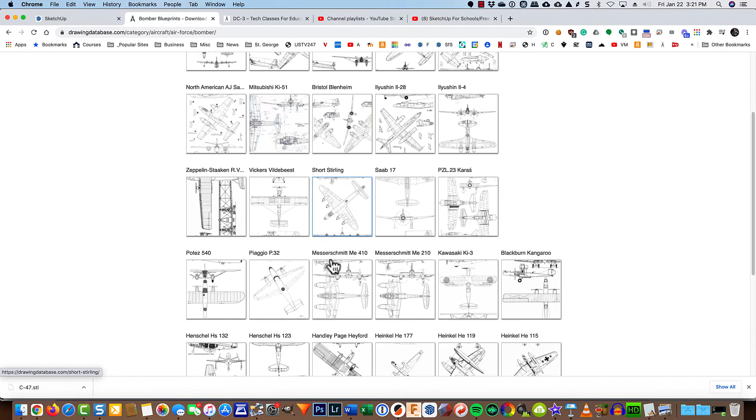I based my design on a blueprint that I found from drawingdatabase.com. So if I just type in C-47, there it is. Now there's all kinds of other aircraft. So if you wanted to make like a Lancaster bomber, I'm sure it's in here somewhere. Here's Heinkels, whatever you want to do.

It's basically going to be the same process. On my website, though, I have a link that you can click right here so that you can download the blueprint if you decide to stick with this one, or your teacher can give it to you.

Before we get started, a few tips. First of all, this video that I made right here is probably going to be indispensable. When you look at the table of contents, you'll see that there's all kinds of indexed videos. It's an hour and a half long. I don't recommend you watch the whole thing start to finish.

You're not going to learn much that way. However, as you're following along, one mouse click at a time building your own DC-3, say I do something with the Move tool and you want to know a little bit more about it—well, there it is right there. So you just click on that time mark.

And it'll open up at that specific spot and give you a one or two minute explanation of how you use the Move tool. You also have, within SketchUp, the instructor. Once I start a command, say R for rectangle, the instructor over here is going to give you a quick overview of how to use the rectangle tool, but much more important are the modifier keys.

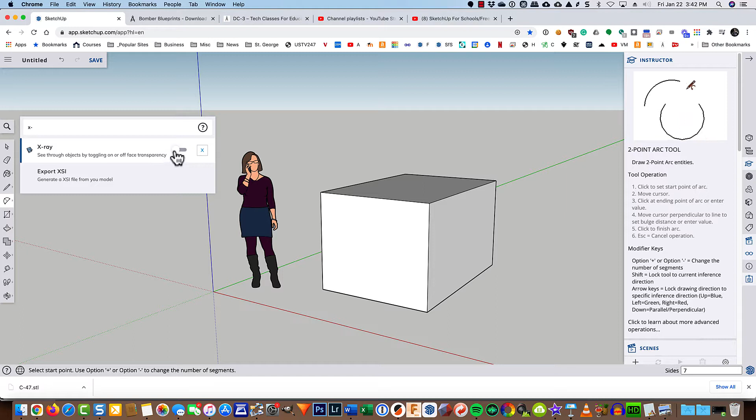The one that I'm going to use time and time again during these screencasts is X-ray. So I'll type in X dash, and there's X-ray, and you can see right here that I have already set my keyboard shortcut to the X key. So while you can turn it on or off like this, once you've set that keyboard shortcut, you can just type in the X key. That is probably the most useful keyboard shortcut that I can suggest for you.

So let's go ahead and get started. Okay, let's go ahead and get started. I am using the web-based version of SketchUp.

That's either SketchUp Free or SketchUp for Schools. Essentially the same thing, except that if you're using the free web version, your files are stored in the cloud on Trimble Connect. And if you're using SketchUp for Schools, they are stored on your Google Drive. So we're going to go ahead and create a new file using millimeters, because that's what we use when we're working with 3D printing slicing software.

So we'll select that, and then we're going to take and just get rid of the lady. We don't need her. And you might have a different figure—it just depends. Now you've got all your different tools over here that you can use.

I'm going to be using keyboard shortcuts. So when I want to make a line, I'll type the letter L, and you'll see it pop up on the top of the screen. I'll verbally tell you which keyboard shortcuts I'm using. I find them much easier than trying to find where they hid the line icon or the arc icon, or some of these nested ones that you don't use very often.

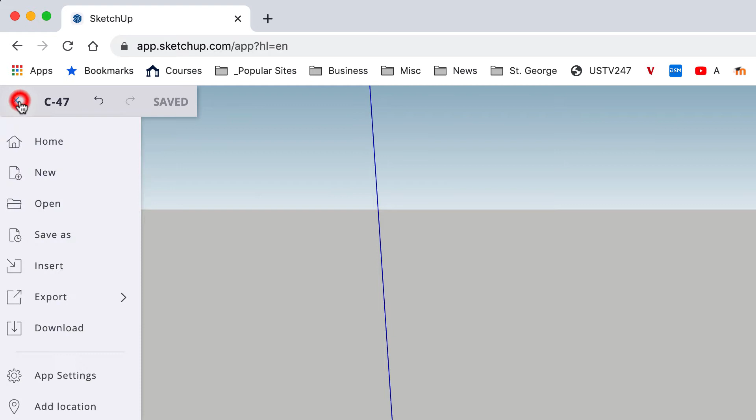Let's begin by inserting our blueprint. We'll go up to Insert, and I'm going to insert it from my computer. There's the file, so I'll double click on that, and I want to insert it as an image. There it is, stuck to my cursor.

It's good practice to place the corner of your image on the origin, where the blue, green, and red axes meet. So I'll click once, and as I move it I can resize it. It doesn't matter at this point how big or small you make it when you click the second time, because the next thing we're going to do is resize it properly.

So there it is. Now I'm going to come in here into my scenes and go to my top view. So there we have it—that is our image that we're going to go ahead and trace.

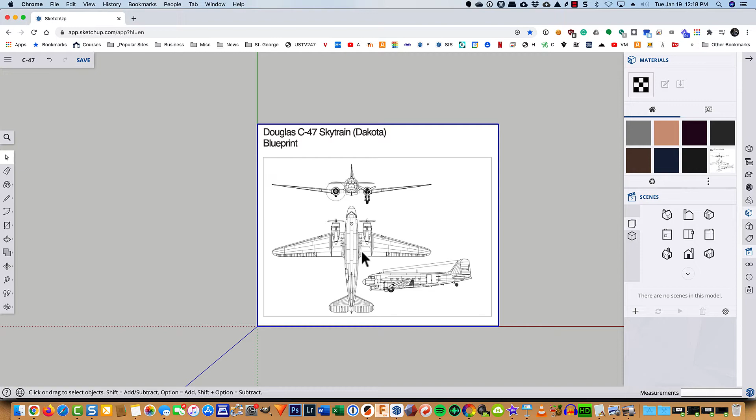Now, remember how I said it doesn't really matter initially how large you bring in the blueprint? That's true, but now we're going to size it properly. Your 3D printer is going to have a space limitation. Mine happens to be about 210 millimeters wide, so if I make my wing too big—say 300 millimeters wide—my printer won't be able to execute that. However, it's a good idea to know the size limitations of your printer.

However, if you're unsure at this point, just go ahead and make the wing 180 millimeters wide, because once you export this, you can scale it bigger or smaller and everything scales proportionally, so that'll work as well. So let's get back into SketchUp here.

We're going to zoom in on the wing, which is the widest or longest part. I'm going to type L for line, and just draw a line approximately from one wingtip to the other. Now if you look down in the measurement dialog box in the lower corner, it told me that line is about almost 1800 millimeters long, and that's obviously too long, isn't it?

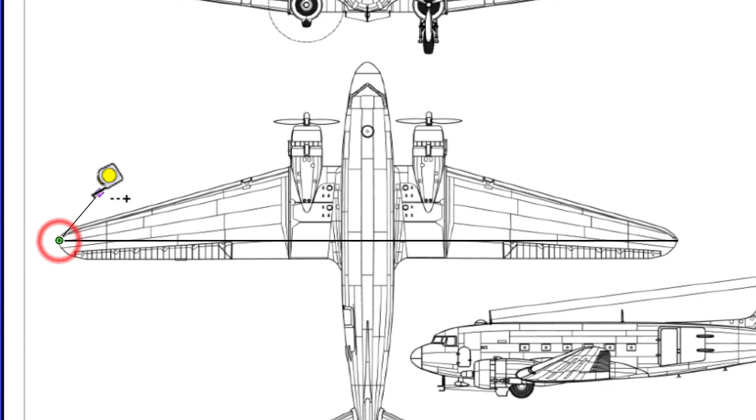So let's find out how long it is exactly by typing T for the tape measure tool, and let's measure from this endpoint to this endpoint of the line—the pop-up tells me it's 1756 millimeters long. I'll click on the other endpoint, and then without doing anything else—don't click the measurement dialog box, don't click OK, don't hit enter—just type in 180 using your keyboard. When you hit enter, you get a pop-up asking if you want to resize the model, in other words resize everything. We'll say yes, click OK, and it looks like it shrunk, and in real life it did.

So I'm going to type Shift Z to do a zoom extents to bring everything into view, and now when I measure this, it's 180 millimeters long. So anything we draw from here on out, we can be pretty sure it's going to fit on the bed of our 3D printer.

Now I'm going to type the space bar, which brings up the arrow or select tool—it's this one right up here, and that's a very handy shortcut. You can get out of any command by typing the space bar, and it brings you back to the select tool. I'll click on that line because I don't need it anymore—I only used it to scale the drawing. And hit delete, then use the wheel on my mouse to come in here.

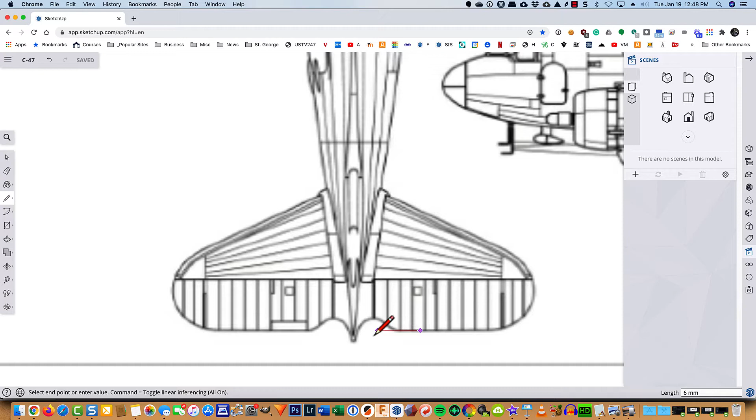I'll use the icon this time. Actually, technically it's the line tool. Let's just go ahead and click on this line right here for now, and let's go over along the red axis. Let's zoom in here so you can see what's going on a little bit better. See how it's kind of jumping around and snapping?

Okay, so we need to go back and adjust something. I'm going to hit escape right now, and I'm going to come into my model information. So with my model information opened up here, you can see that we are drawing in millimeters.

We want to change the precision, because right now it's snapping to every 1 millimeter. So let's change the precision to 3 decimal places, and let's change this number here, instead of 1 millimeter, let's make it 0.001 millimeters, which is really very small, but that's okay.

So we'll hit enter, and then we'll come back and restart our line tool, and come from here over to about there. I'll go ahead and pause right there, and then I want to come up a whole number. Right now I'm looking down in the measurement dialog box, and it says about this point it is about 19-20 millimeters.

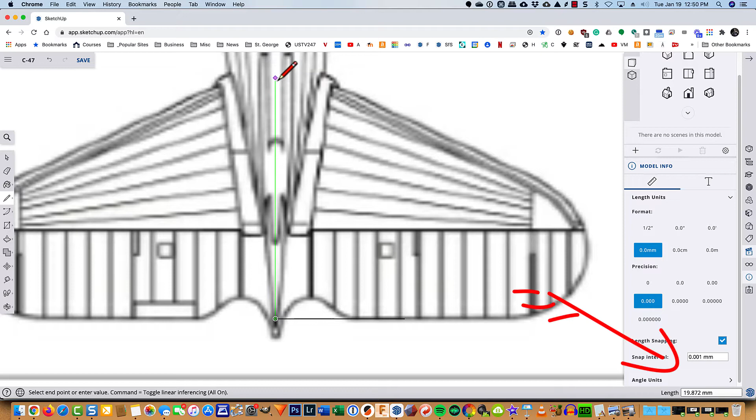So what I'm going to do is just click well short of it, and then I can change the length of the line by just typing in 20. So I type in 20, and I did not click down in that box—if you do that, it's not going to work. You just go ahead; SketchUp is waiting for you to tell it what to do. So we'll type in 20, hit enter, and we've now got a line that is 20 millimeters long.

And I'm going to come over to about here on my fuselage, and then I'll come down to about right there. Now you don't have to trace it exactly—what I'm doing is good enough. And then I'm going to come down to here, click, and then along the red axis, click there, and you should get a face.

SketchUp draws everything based on a series of edges, and when you enclose or connect those edges so that it's what's called watertight, then it makes a face for you. Of course, all the edges have to be in the same plane.

Now you can zoom in here and try to make a semi-decent arc, but instead what I'm going to do is just type in A for arc. I'm going to click once here—that's where my arc starts. Down in the lower left part of my screen, it asks me where do I want the end point of the arc to be.

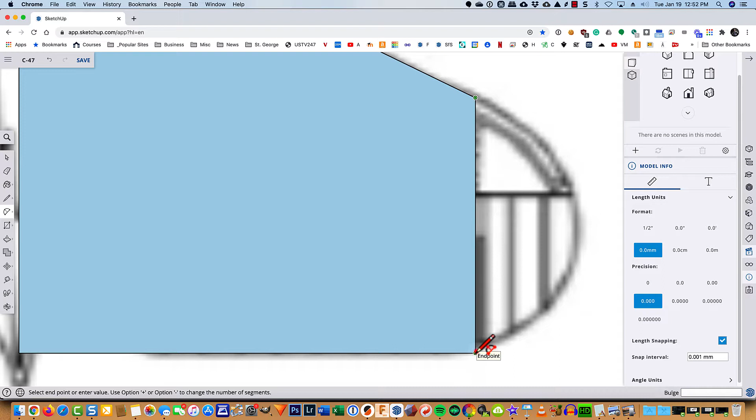So I want it to be right there, so I'll click one more time, and then we give it what is called the bulge. Now see that red line across the middle? That means we're drawing in the same plane, along the red axis. And we'll come out to about here.

E for erase, and I can erase this line segment here. So I've now got half of my horizontal stabilizer.

I'm going to go ahead and choose a view like this. You can also hold down the wheel on your mouse to orbit around. And I'll zoom in here, and now I'm going to use the push-pull tool to give this thickness. So I'll come to this face, click on it, pull it up, and type in 2.5 millimeters.

So now you've got two numbers that are important to remember: the length of this right here, in other words we're looking at this rectangle right here—the height of the rectangle is 2.5 millimeters and the length is 20 millimeters. And we're going to need that for making that rectangular hole in the fuselage.

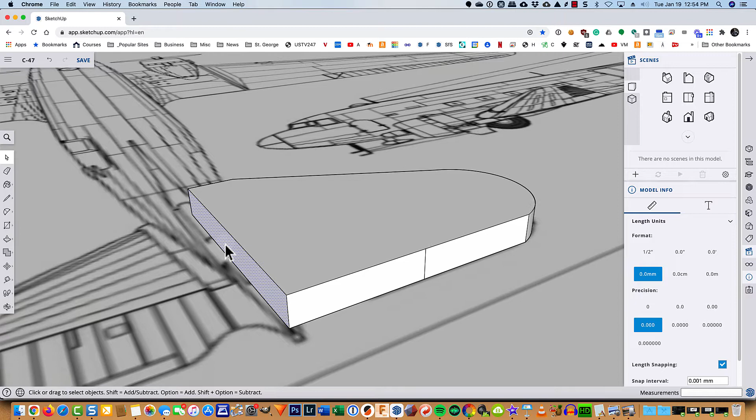So with this much done, I'm going to select this geometry. To do that, I'll draw a box around it, holding down my left mouse button to select everything completely enclosed within that selection box. And when I let go, there it is.

Now I'm going to copy it, Command or Control C, and paste it. And now I've got another one. It doesn't matter where we put it, so let's just stick it over there for now.

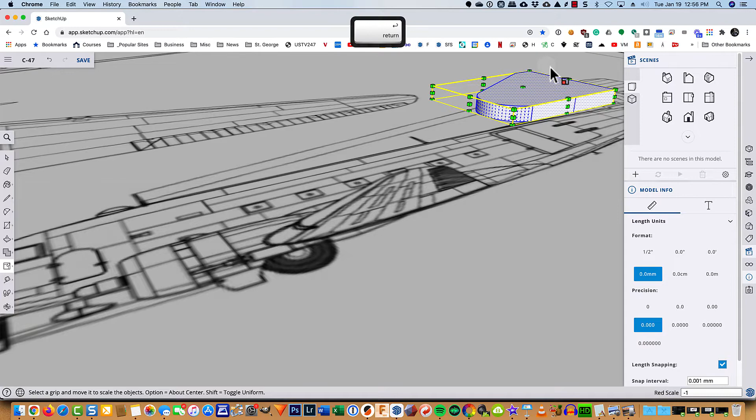Then I'm going to type in S for scale. If you've used other CAD programs and you're used to mirroring things, SketchUp doesn't have a mirror button or command. What you do instead is scale it. So I type S for scale, grab this point right here, and start to drag it and turn it inside out. Where you stop is always -1. I stopped at -0.8, so I'll type in -1 — it's always -1 if you want to mirror something. I'll hit return. So there we have that.

Hold down my shift key, press on my mouse button, and now I'm going to move this into position. With it selected — and if you accidentally deselect it, draw a box from upper left down to lower right around it like that. Or another way to select all of that geometry is to triple click on it quickly.

Then I'm going to type M for move, and down in the lower left corner it tells me to pick my base point. So I'll pick that little part right there, and then it's moving, and I'll zoom in and connect it right there.

Now I've got some extra lines, and normally they're not going to make a big difference. However, in 3D printing, extra lines can goof stuff up. So let's take our eraser — let's click outside here to deselect everything. Now let's choose E for eraser, because I don't need that line segment, or that one. I'm going to run it over, upside down here, and I can't see it because the drawing is in the way.

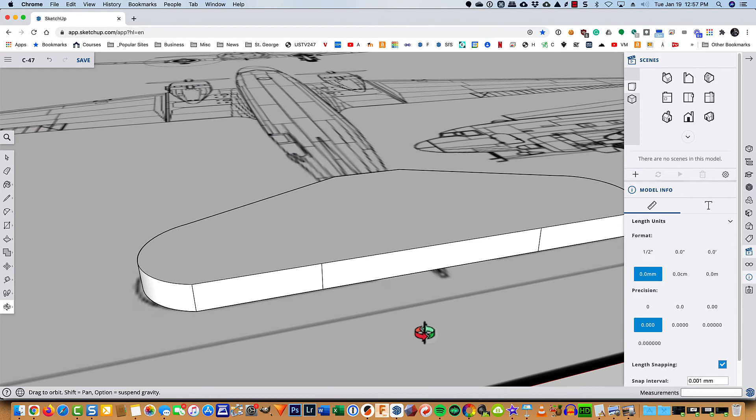So I've got one here, and remember I told you to make a keyboard shortcut for X-ray? If you did that, type in your X key, and now I can see that line segment right there, and I can erase it. Type the X key again to turn X-ray off, and we've now got our part.

Our horizontal stabilizer is nearing completion. Now at this point, it's very important that you connect all this geometry together to protect it. All these line segments and faces need to be grouped together. Fortunately, that's very easy to do. I'll go ahead and tap my space bar, then triple click on all of that geometry, right click, and make it a group.

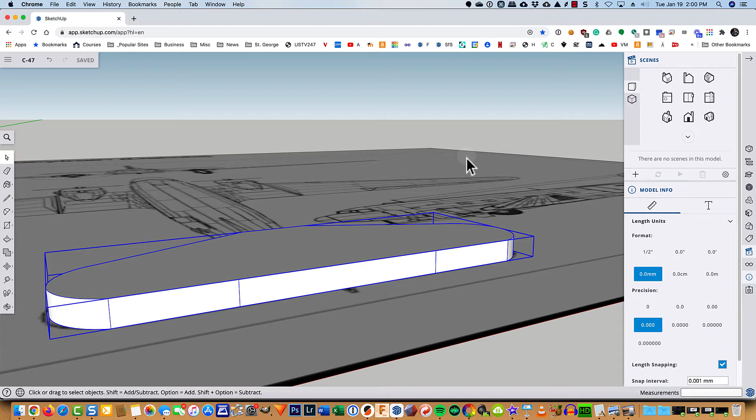And then I'm going to come up here and choose Save, and we'll add the elevators as soon as that's done. We're going to use the push-pull tool to add our elevators, and we'll be using it for adding other little details, because right now this horizontal stabilizer is kind of plain looking. Let's go ahead and talk about how we're going to do that.

I'll just go ahead and make kind of a box here quickly. Now if I want to change the geometry of this — say, for example, put a hole in this box — I type C for circle, draw my circle on the face, and then use the push-pull tool to pull in. If I want the hole to go all the way through, I need to orbit around so I can see the back side of the box. And when I go back, see that dual shading? That's called inference — it means I've reached that back face. So when I let go of the mouse now, I've got a hole.

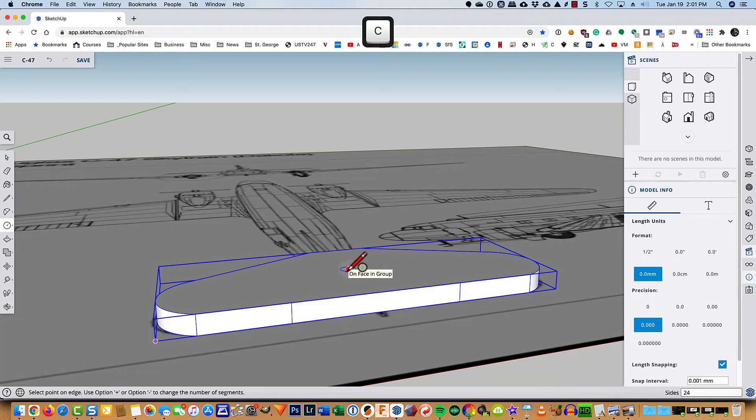And so we're going to basically use that skill to add some detail. I want to draw this way so I can just delete that. Okay, remember this is a group. So if I draw a circle on my group and try to make a hole through it with the push-pull tool, I can't go down. I can go up, I can make a cylinder, but I can't cut inside the group.

And that's because the group is essentially locked. Remember, we made it a group by triple clicking on it, right clicking, and choosing to make a group. Now, if we want to make changes to it, we can right click and choose Edit Group, or a quicker way is to select it and then quickly double click on it. You get this dashed line around it, and now we have our individual faces that we can edit. By the way, we don't need this line segment here, and we don't need this line segment here.

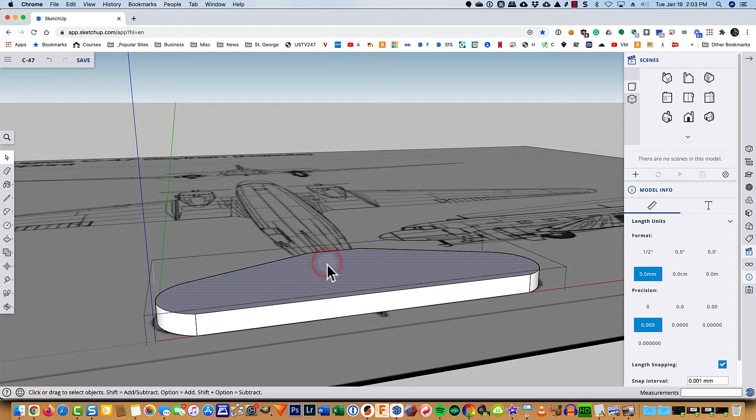That was created because I started drawing the profile of the horizontal stabilizer at a point about here on the drawing. Now, I can go to my top view here if I want to look directly down at it, but here's another trick for you.

Go ahead and select a face, not the group, but just a face, then right click and align the view. And now we're looking directly at it. So I'm going to turn on X-ray mode so I can see the drawing underneath. The first thing I notice is that I have two sort of concentric lines - not quite the right word since that refers to circles or arcs. However, I've got an edge here which represents the bottom of the horizontal stabilizer, and this edge here which represents the top of the same.

That is because this is in perspective mode. Let's go ahead and turn it to parallel projection here up in the scenes window. See, now the lines are on top of each other because we're looking directly at it.

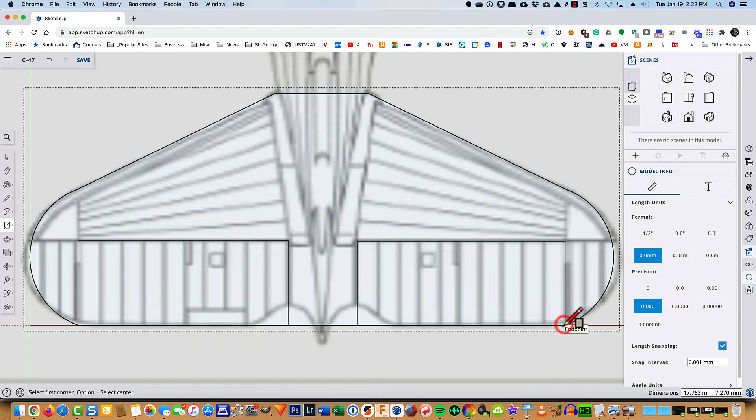So now what I want to do is draw my elevators, but what's important is that again I double click on this, or this time I will choose to edit the group. Then I'm going to type R for rectangle and pick that point right there and draw up to here along the face. Make sure you're on the face, and then I'll do the same thing about here and come down to this endpoint or vertex. So I'll turn X-ray mode off now and check my work.

So this is a surface or a face, this is a face, and this is a face. I have now split what was the top face of the entire horizontal stabilizer and created a couple of elevators for myself. So the next thing I'm going to do is just kind of draw some lines.

So I'm going to click on this face right here, and type in F for the offset tool. When I click inside, I can now draw a similar rectangle - we'll say that much right there. And I'm looking at my measurement dialog box, and we'll just type in 0.6 millimeters.

And we'll come over to this face right here, select it, type in F for offset, click, there we go. And again, I'll just type in 0.6 and hit enter. Then I'll check my work. So that's a face, that's a face, that's a face, that's a face, and that's a face.

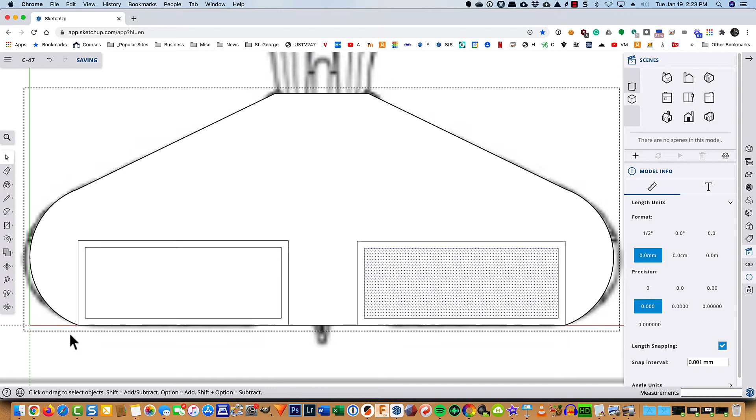And I can work with each of those with the push-pull tool. But what I want to do is split this. So I'm going to come up here, type in L for line, and just draw a line segment like this. Come over here, draw another one like this.

And now I'm checking my work. That's a face, that's a face, and that's a face. So I'm going to go E for erase, and erase that line segment right there. So I've now just got this and this, and this is what I am going to push-pull.

Come over here and do the same for this. L for line, draw along the green axis like so, pan over, draw another line like this, E for erase, check my work, and I've split those faces correctly.

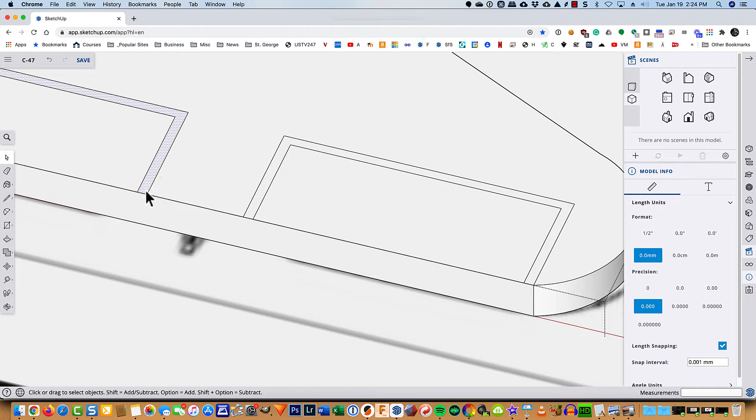So let's go orbit down around this for now, and I'm going to use P for push pull - got to select this first. P for push pull, and I'm going to pull down, looking at my measurement dialog box. I think about 0.3 will work, and then I can come over here, and if I just double click on this face, SketchUp remembers that I want to go down 0.3 millimeters. Whatever you used last, it will remember that.

So I'll click outside to close my group, and my horizontal stabilizer with elevators is now complete. Next, we're going to make the main wing, and it really isn't very much different than the horizontal stabilizer. I mean, they're both wings. We just need to make some modifications for our engines and landing gear.

So again, I'm going to just start with the line tool, kind of mousing along here. And again, I want this value to be a whole number so it's easy to remember. So I'm on my face and looking at my measurement dialog box, and it looks like about 28 will work. So without clicking, I'm just going to type in 28 and hit enter. And I've now got a line that is 28 millimeters long. Then I'll come across here, maybe about that point right there.

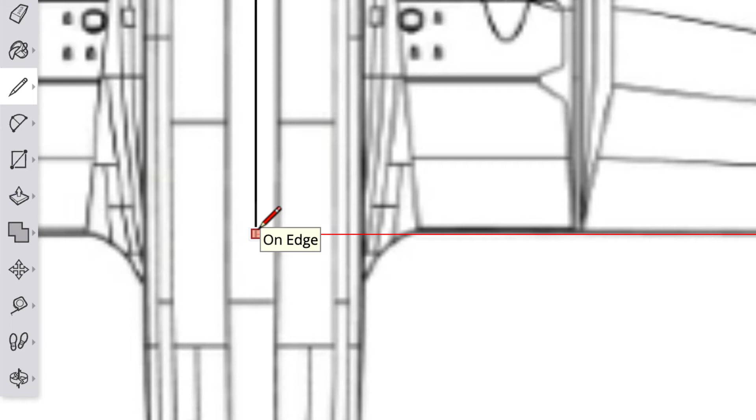And then I'll come down to about here, come down like so, and let's add a little bit extra detail. We'll make that like so, and then come directly across. And what we want to make sure is that the preview is showing that we're going along the red axis. So I'll go ahead and click, and that makes my face.

Now notice we've got a little bit of an extra line segment there, so I'm going to type in E for eraser, hold down my left mouse button, and drag through that. Sometimes you have to drag slow, because with the web-based version of SketchUp, all the heavy lifting is being done by computers in the cloud.

So this time when we make the wingtip, since this is more of an elliptical shape, we're just going to use the line tool to trace it. We're going to zoom in, and we'll click right here, and I'm just kind of coming around. Those magenta lines are telling me that's a continuation of the line, and I want it to bend. So there we go.

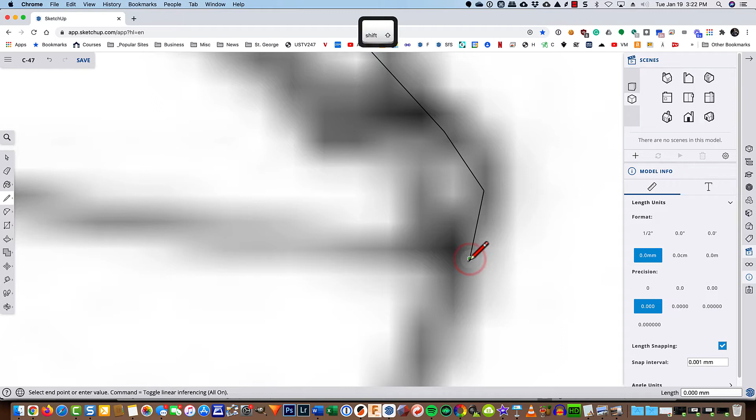Again, it doesn't have to be traced perfectly, but the closer you get it, the more time you spend zooming in and clicking, the smoother your wingtip will be.

I'm just holding down my shift key and pressing my mouse button so that I can pan around quickly. And then we'll connect that endpoint right there, and we should get a face. And we do.

So that's kind of sharp, isn't it? Let's go ahead and use our line tool to go from this midpoint down to about that midpoint, and then E for erase, and I'll slowly drag through those right there, and that smooths it out. That looks pretty good, and I'll get rid of that line segment right there.

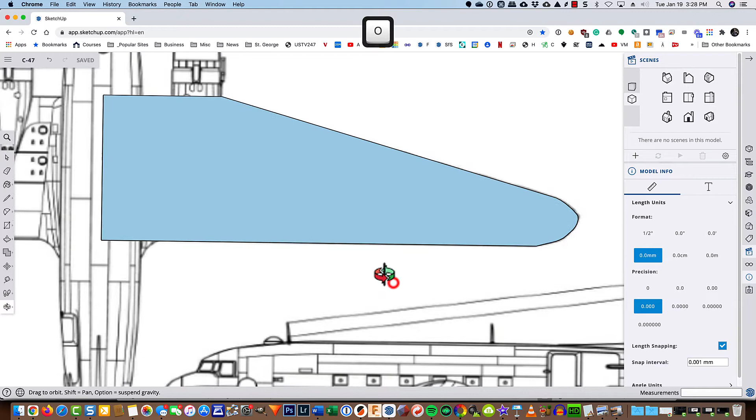So now let's go ahead and orbit this around. This time, to execute the orbit command, I'm going to just press the O key, and just kind of move up like so, and then go back to my select by pressing my space bar. Select this face, P for push pull, and pull this up the same as the horizontal stabilizer, 2.5 millimeters.

Then I'm going to go ahead and triple click on this half of the wing, and then choose to make it a group. Now to add my ailerons, I'm going to go ahead and edit the group. So I will right click and choose to edit the group. I'll select this top face, right click, and align the view so I'm looking directly at it.

Press my X key so that I'm in X-ray mode, and you can see right here the general outline of the ailerons. So let's go ahead and trace that. Again, you have to be inside the group, working and editing the inside of the group for this to work. So there is the outline of the aileron, but it's not going to show up in the 3D print unless we offset that line.

So I'll type in F for offset, click on this face. Whoop, I had more than the one selected, so there we go. Oh, you see what I did there? I missed that point right there, didn't I?

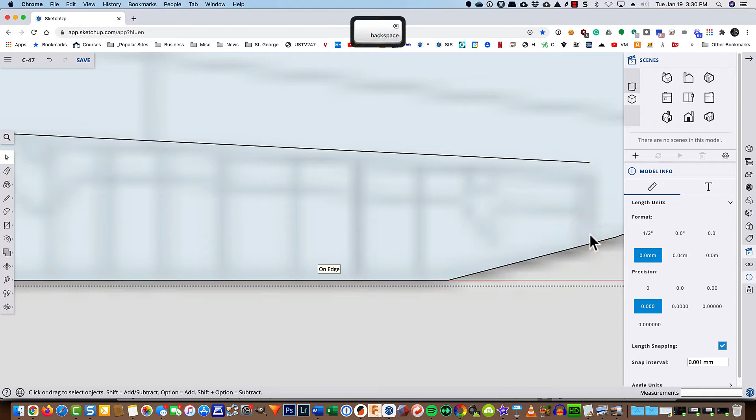So I'm going to take that line segment right there and delete it, and then go back to my line command and come down along the green axis and select that. So now checking my work, I'll go to the select tool, and that is a face, and this is a face. So I'll type in F for offset, click, and maybe, what did we do before? 0.3? Doesn't have to be exactly that, but that's good.

So L for line, and we'll split that face. Then we'll come across over here and split the other part right up here like this. And then E for erase, and erase that line segment.

And we'll check our work here. Let's turn off X-ray, and with my select tool, that is a face, and that, missed. Got to zoom in. There we go. That's a face, and that's a face up there.

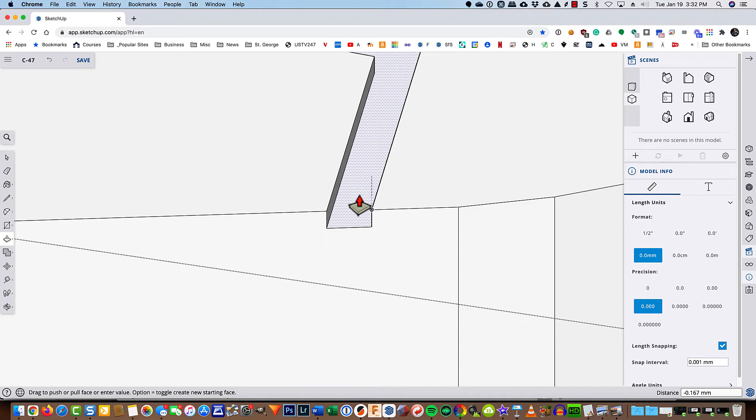So we'll now take and kind of orbit around like this. We will zoom in, select that face, type in P for push pull, and pull down. I don't remember how much we pulled down before. I should probably be taking notes, but just eyeballing it, that looks like a good amount. So we'll just type in 0.2, and that part of the wing is coming along nicely.

Now you can embellish the top of your wings any way you want. I am going to embellish mine with invasion stripes, because each C-47 during the landings at Normandy on June 6, 1944 were painted with black and white stripes on the wings and on the tail of the fuselage.

It didn't matter if it was a C-47, a fighter, a reconnaissance airplane, or bomber, whatever. They all had these stripes, so they were easily identifiable.

So to do that, if your group is not already edited, just double click on it to open it up for editing. You'll be able to identify that it's now ready for editing by the dash box that goes around it. I'm going to type in L for line, and go from this vertex along the green axis down to here.

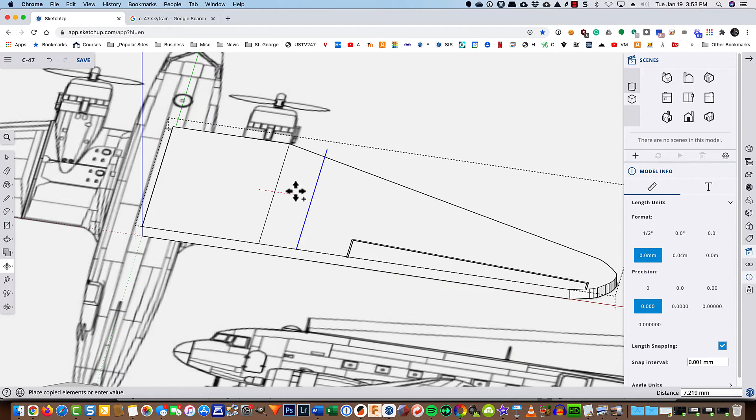Then I'll tap my space bar, select this line, and type in M for move. It doesn't really matter where I click for a base point, but as I start to move it, it starts to do some goofy stuff. But what I want to do is not just move it, but copy it. So I'll tap my Option or Alt key once, and come in here and eyeball what looks like a reasonable distance.

Let's see, that's about 3 millimeters. I'll just type in 2, hit enter. If I don't like it, without clicking anywhere, I can type in 3 and hit enter, or type in 1 and hit enter, and do that over and over until I get what I want. But I kind of like 2, so I'll type in 2 and hit enter.

Now I can do that again and again, and that works, but SketchUp has this neat tool built in. Notice I have not clicked my mouse, I have not touched my keyboard. But what I'm going to do now is type in 5x to make 5 more copies. And now I'll hit enter. So now I have 1, 2, 3 invasion stripes.

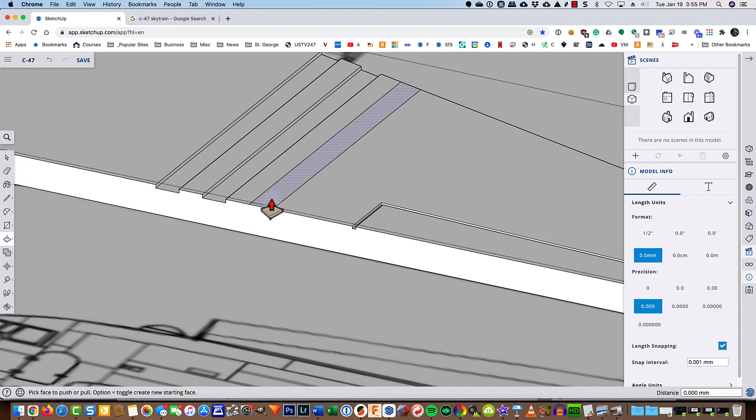So I'll go ahead and hit enter, grab my select tool, E for eraser, and slowly drag across this extra geometry up here that I don't need. Then I'll orbit around, click on this face, type P for push pull, pull down a little bit, so we'll say 0.3, and then double click here and double click there, and I've now got my invasion stripes.

So there's just one more thing we need to do. Let's click on this group and double click to open it up for editing. Right click and align the view so we're looking directly at it, and type X for X-ray. What I need to do is make a notch, and you'll see why later on, for the engine and landing gear assembly that we're going to use for assembling our model.

So I'm going to again execute the line tool, pick a point about here, come down, in this case maybe about 6 millimeters. I'll come across 2.5 millimeters because that's the thickness of our 3D printed parts. Hit enter and come up to here. So now checking my work, that's a face and this is a face.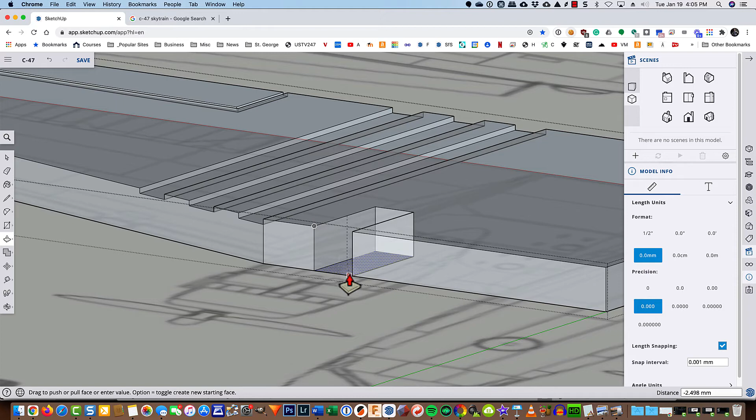So I'll orbit around like so. There we go. My mouse doesn't always work with the web-based version of SketchUp like I want it to. In any event, P for push pull. I'll click on this face and pull down until I get to this bottom edge, and that makes a notch for me. So we'll turn X-ray off, and you can see we have that notch.

So I'll hit my space bar for select, click out here, and you probably know what's coming next. I'm going to take this, copy it, then paste it, click up here, type in S for scale, grab a grip and start to drag. And what number do I put in if I want to mirror part? Excellent answer there, Andy. So we'll type in -1 and hit enter, and we now have a mirror image of that group.

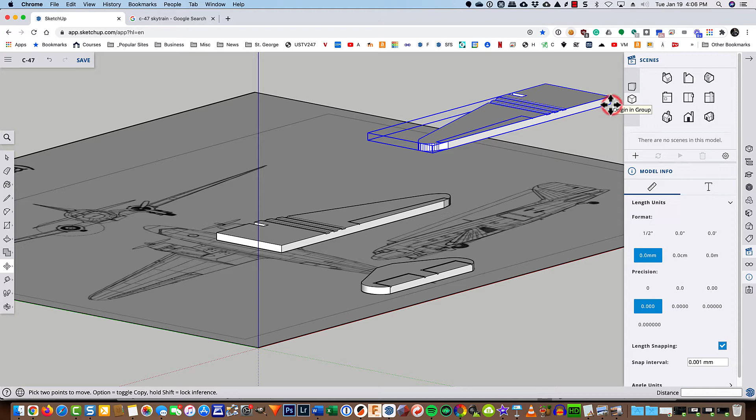So I'll hit my space bar to get back to my select tool. It's still selected. Type in M for move, grab that vertex right there and come down and attach it right there. And that's looking pretty good.

All we need to do now is just go ahead and edit this geometry so that it's going to be happier when it comes time for 3D printing. To do that, since I can't edit two groups at the same time, I'm going to click on this group right here, and I am going to explode it, which basically ungroups everything.

So now that that's done, this is a face, this is a face, this is an edge. I'm going to select this one right here, right click, and explode it. So now it is no longer grouped together. Then I'm going to come up here and grab my erase tool and erase that line segment and erase this line segment. I'll orbit around.

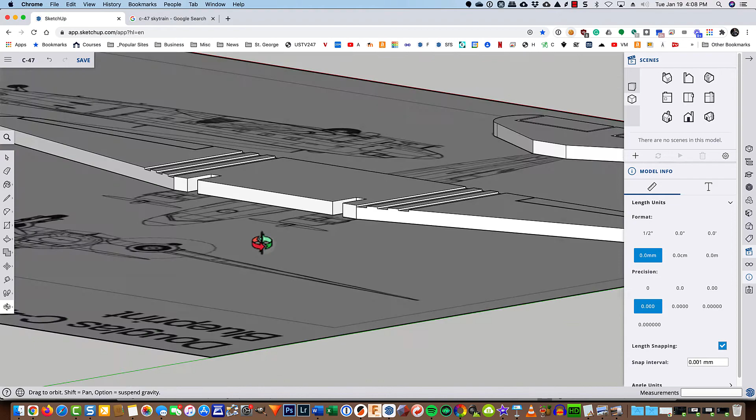Erase that line segment. And remember, because of our blueprint, I can't see the bottom. So I'll just zoom in here, go to X-ray mode, and there's the line segment I want to erase. Then I'll go to my top view and turn X-ray mode off.

And then I'm going to draw a selection rectangle from top left to lower right. Notice the selection box is a solid line. What that's telling me is that only the line segments and faces that are inside of it are going to be selected. It's not going to select the drawing below. When I let go of the mouse, it selects everything that's associated with my wing. I'm going to right click, make it a group, and now the wing of our DC-3 is done.

Next we're going to move on to making the fuselage, and just a couple things I want to point out before we begin that are important. There's a lot of detail in this blueprint: the windows, these little frames right here. It's just a lot of different details, and this is why we need to be a little bit careful when we do our drawing. We need to keep in mind that even though you can draw almost infinitely thin line segments with SketchUp, you can't print infinitely thin lines on a 3D printer.

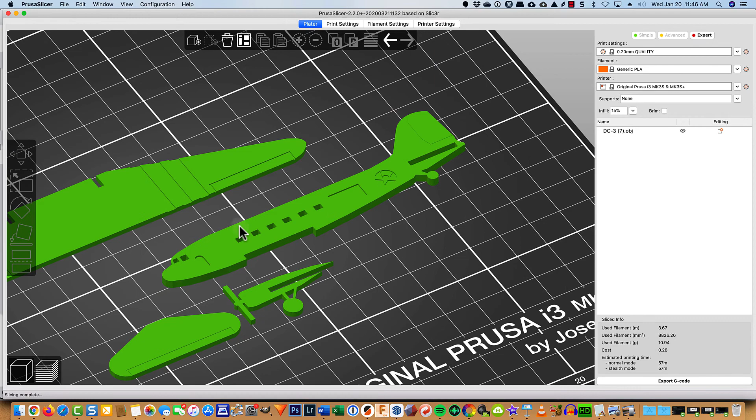Let me explain. Here is, for example, the fuselage right here. I'm going to go ahead and just move it a touch here, and now I'm going to slice it. And that's going to give us this blueprint here. Kind of a color code, but each of these lines here is filament that gets extruded out to form our shape.

You'll notice if we come up here to the window, or the cockpit windows, that when I modeled this the first time, I was really careful in this area not to get too close, because if you look right in here, you can see that that's only 2 layers thick for the perimeter going around the windows. Same with the doors, same around here. So we can't get too detailed.

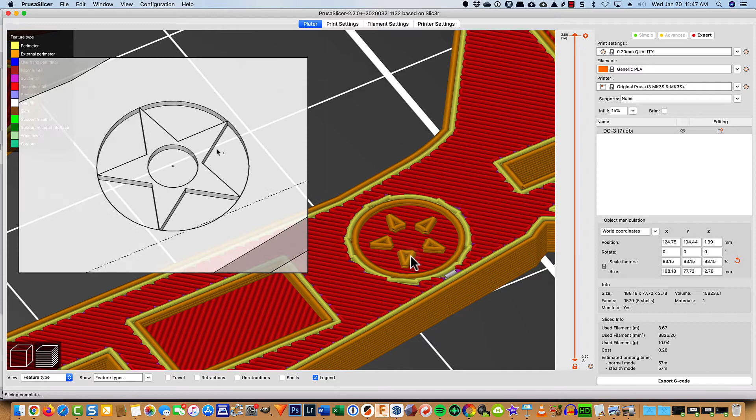The star in the back here, see it, there's a lot more detail in the SketchUp model when I made it, but the 3D printer just couldn't slice it that precisely. So let's keep that in mind as we go ahead and get started on the fuselage.

Let's go to our top view, and then we're going to zoom in on the nose, and I'm going to go ahead and do the nose, which is the most complicated part first, and then just kind of quickly click around, because if you can do the nose, you can do the rest of it. So we're going to start with the line tool just as before. Maybe I'll start about right here, and we want to make sure that we stay on the face of the image with each click.

It's a straight line there for the front of the windshield. And the more you zoom in and the more little edges that you create here, the smoother your model's going to be. That is, the edges of it when you 3D print it. So I'm going to come straight down like that, and just kind of come along here.

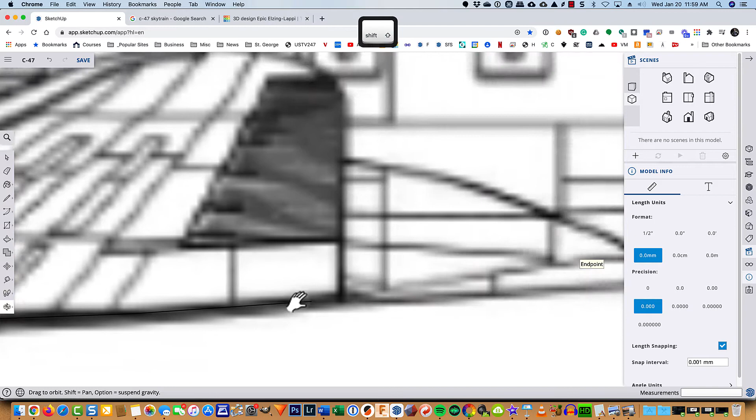And then we can't see behind the engine and the wing, but we'll just kind of guess here. Again, zoom in and out. And let's see, maybe I'll connect that endpoint along that edge there, and then erase this and this. Okay, and then let's see here.

I want to go ahead and just close that so that we have a face. So there's an endpoint, and I think I started up here. There we go. So there's our face.

And so let's go ahead and put the nose on this, and I'm going to try an arc. Let's see how that works. So there's my start point, there's my end point. I'll just pull it out like that. You know what? I'm going to redo that, and this is why.

I want it to be really smooth, so when I click on arc, it doesn't ask me the number of sides, but I can bump it up and down, remember, by holding down the Option key and pressing the plus and minus sign. So 10's probably going to be pretty good. Again, it just depends upon what level of detail you want. If it's too many sides, you're going to have to shorten it.

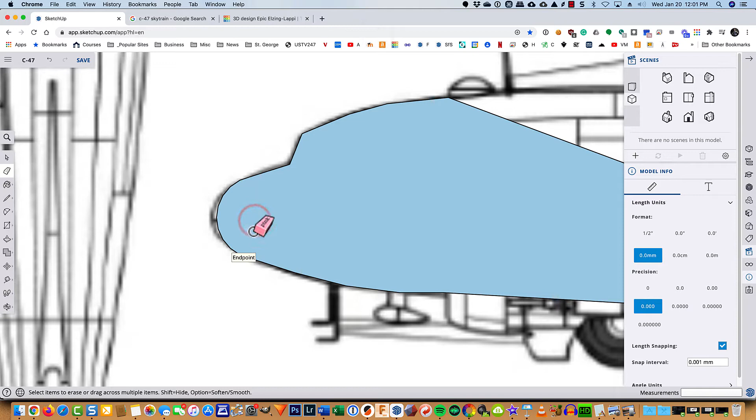We'll take our eraser tool and we'll erase that line segment right there. And now we're going to turn on X-ray so that we can trace.

And there isn't really any way I can put this window framing in, you just have to be careful. Remember, your 3D printer extrudes liquid filament at typically 0.4 millimeters. So if I put a guideline off of this edge and pull out, then type in 0.4 and hit enter, that is the width of one bead of filament. So that would be—I kind of like to have two beads.

So what I'm going to do now, when I make this line, I'll erase that guideline or undo it. I'm just going to come to here, across to here, down to here, not on the line but on the face, like so. The reason it didn't make a face is because we have X-ray turned on.

See, that's its own face now. So let's turn X-ray back on, and let's put in one divider anyway. I'm going to take this line, grab my tape measure tool, and don't grab it by the midpoint, just grab it along the edge here. Let's pull back parallel to that, maybe right about there. I'm going to erase this guideline because I don't need it anymore.

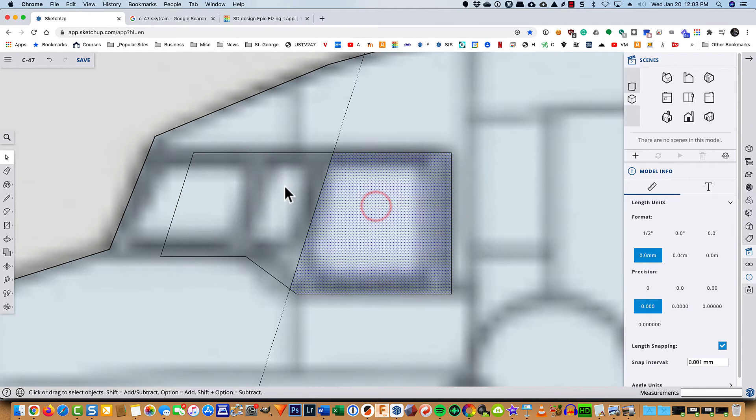There we go. And then I'm going to draw a line here. Whoops, I missed—let's zoom in here. From this intersection up to this intersection, which splits that into two faces. And then I'm going to take my tape measure tool and pull back this way. Okay, excuse me, phone rang.

So I'm going to just copy this line over. A lot of ways I could do it, but I'll just pull out another guideline, maybe to about there. That's 0.7—let's make it 0.8. I'll type in 0.8 and hit enter. Now I'm just going to draw another line from this intersection down to there, then erase that line segment and that line segment, and I can erase the guidelines, and there are my windows.

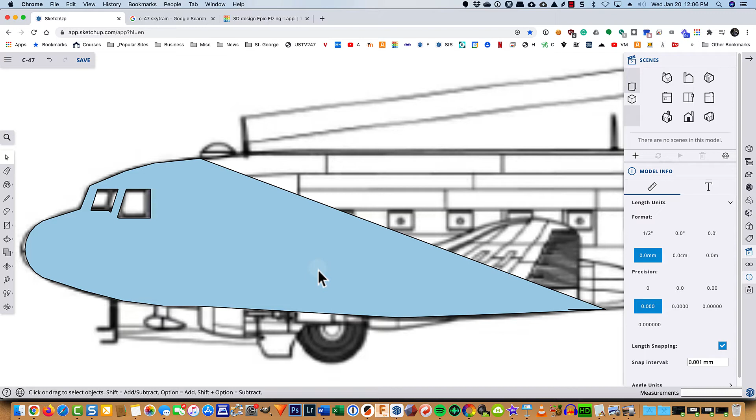So I'll turn X-ray mode off, select this face and delete it, and select that face and delete it, and that looks pretty good. We'll see how it slices—we can come back in and fix that. So I'm just going to stop talking here and start filling in some of this geometry, and as I need to, I can come back and explain things for you.

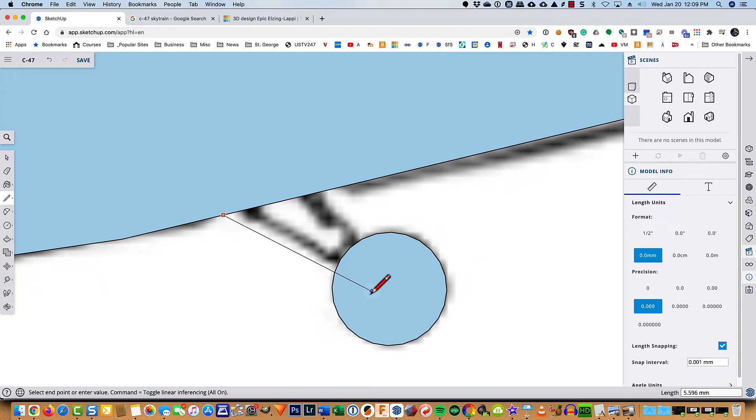Okay, so that's looking pretty good. Let's go in and talk about this tail wheel here. I'm just going to type in C for circle, and that's going to make a face like this. Then I'm just going to make a line from maybe about here—there's the center—and then from here, maybe up to about there. And then I'm going to erase that segment, and those segments. So there's my tail wheel.

And one more thing I'm going to do: I'm going to put in these cabin windows. So follow along closely. I'm going to come in here and make one of them, just R for rectangle, maybe from about there to about there. Now, this is a face, and it's also four edges. So if I double click on it—not triple click, but just double click—there we go. Then I've selected the face and the edges.

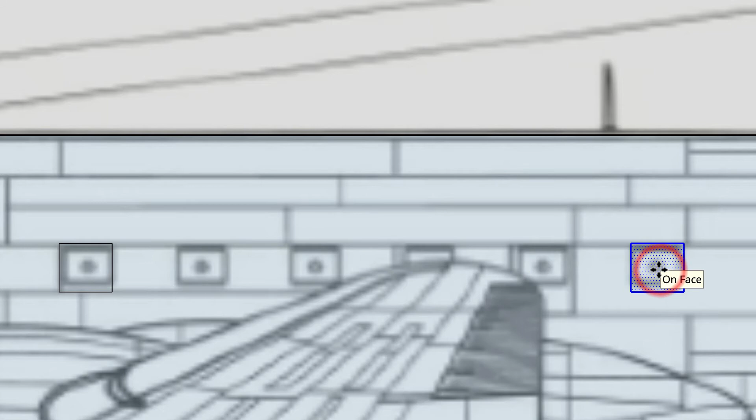Now I'm going to do a move copy, but there's no specific command—watch this, it's pretty cool. I'm going to type in M for move, and just click anywhere on the face. Doesn't really matter—now I can move it around anywhere I want. However, if I tap my Option or Alt key, it's now making a copy. So I'm going to come down to this window and click. Now I could do that one, two, three, four more times, or I can just go 5 divided by and hit enter. I've just made 5 or 6 equally spaced windows that are all the same size.

Let's do that one more time. So I'm going to double click on that, and I'm going to type in M for move.

I'm going to click just about anywhere, and as I start to move it, since I want to make a copy, I tap my Option or Alt key, click where I want to place it, and then type in 5 divided by. But say I wasn't very good at math and put in 3 divided by, then hit enter. Well, it makes 3. I go, no, I need more than that. So again, without clicking, just type in 4 divided by, see what that looks like. 5 divided by does it for us. And so now we're going to go in and...

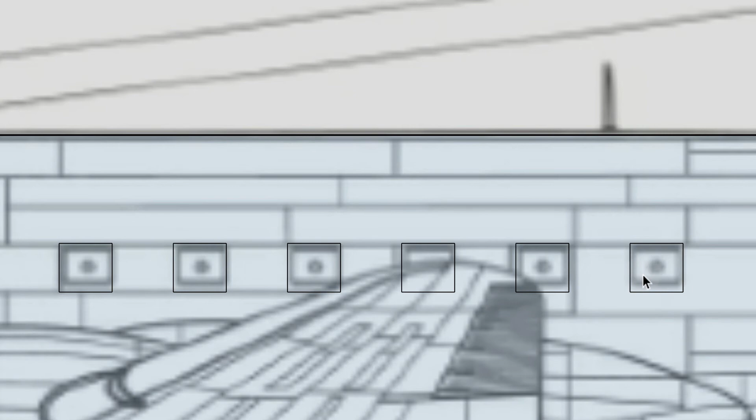Delete these faces. So open up that window, that one, that one, that one, that one, and that one. And the next thing we're going to do is make the openings for our wing and horizontal stabilizer.

Before we cut the openings for our wing and horizontal stabilizer, let's verify our measurements. I'm going to type T for tape measure, click on the top edge of the wing, and come down to the bottom edge along the blue axis, and I get 2.5 millimeters, which is what we did correctly. We'll come over here and measure along this vertical line segment. It's also 2.5, so that's good to know.

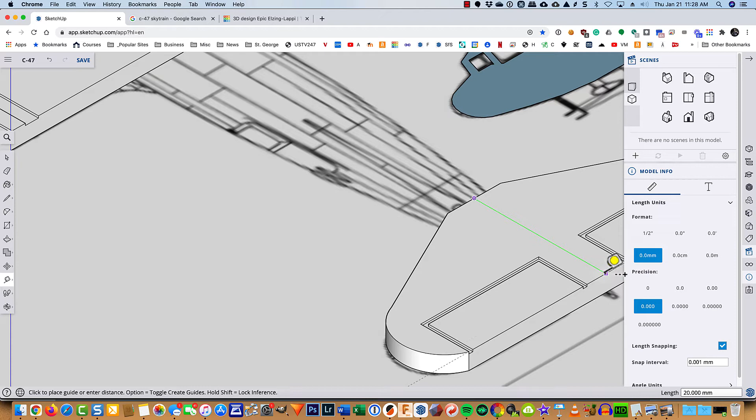I'll hit escape, come from this midpoint, click, and come down along the green axis to that edge, and it's 20 millimeters, so that's good. Let's do the same thing up here. From that midpoint down to that edge, it's 27.690. I must have made a mistake somewhere because I wanted whole numbers. Hopefully you do. I'm going to write that one down. I'm not going to change anything because I haven't made the opening yet.

So let's go ahead and go to that opening. We'll go to our top view and turn on X-ray. It looks like the wing starts about right in this area here. Let's zoom in here and flatten the bottom, so maybe from about there to about there along that edge. And then I'll come in and erase that line segment.

And that one. Then I'm going to make a rectangle tool and start it about where the wing looks on your drawing underneath. I'm going to click and come up like this. Now I'm looking down at my measurement dialog box and it's telling me the length is first. So here's where I'll type in 27.690 - your number might be completely different - comma, 2.5 millimeters, and hit enter.

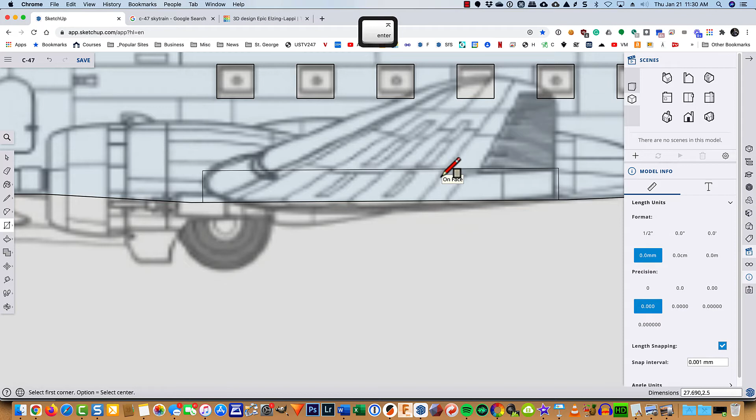And so now when I turn off X-ray and erase that segment right there, I've got a notch or an opening that I can glue my wing into the bottom of the fuselage.

For the horizontal stabilizer, it's essentially the same process. I'm going to type R for rectangle, start about there, come down to about here. Now see, I'm getting awfully close to this edge down here, so I'm going to cheat a little bit. Instead, I'll start a distance about, maybe about there, and come up this way, which will place it a little bit higher in the fuselage body, but that's okay.

So I'm going to type in 20 millimeters, comma, 2.5 millimeters, hit enter, and now I can select this face and delete it.

Now you might find that these openings, even though they're exact within CAD, might need to be a little bit bigger, or that you might need to do a little shaving with sandpaper or a sharp knife to get them to fit. Because whenever you have a hole in a 3D printed object, even though SketchUp is telling print a hole that is 2.5 millimeters tall, you have to think about the process. It's taking this soft, gooey filament and squishing it down on the layer below it, one layer at a time. So the holes always end up being just a little bit smaller than what you model with your CAD program. But I think we're probably going to be pretty close, and I don't mind doing a little shaving and sanding. I'd rather have it be a tight fit than a loose, sloppy fit.

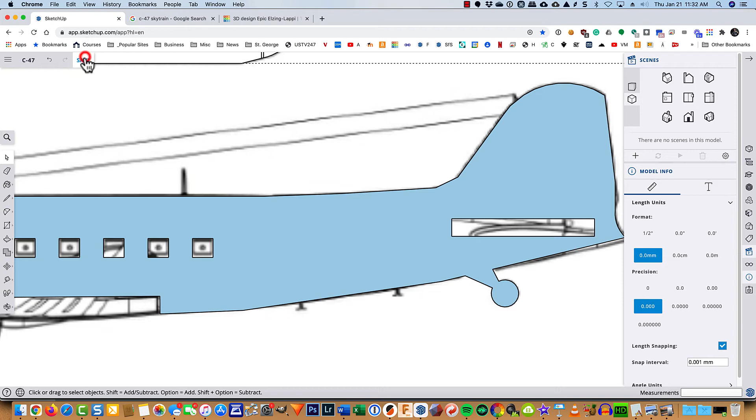So I'm going to go ahead and save this, and then we'll add a little bit more detail. Now our fuselage side is still flat, it's just a face. So before we extrude it or give it thickness with the push-pull tool, now would be a good time for me to come in and clean up a few things that bug me a little bit.

This little area right here is just a little too sharp. I could put it in an arc, but it would be a really small arc, so instead I'll just cut off the corner with the line tool. I'll zoom in here, from about there on the edge to about there, and then erase these two segments, and that looks a whole bunch better.

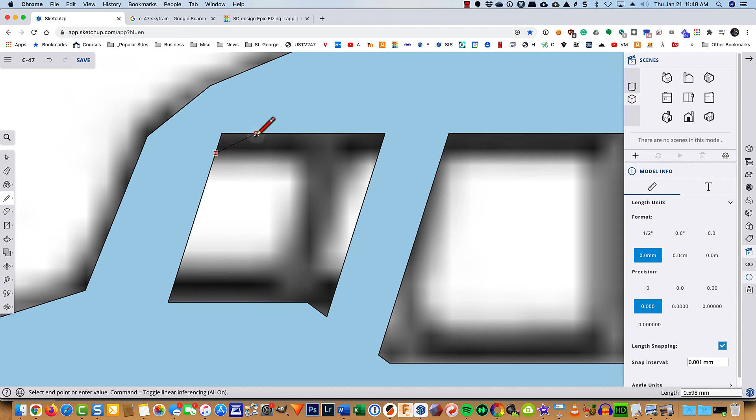This area right here is kind of a little thin. Remember when we looked at the slicing software and could see the individual lines of filament? I'm going to do the same thing, just give myself a little room here, maybe come back to about there. It healed the face, but that's super easy to fix - use my select tool and delete it, and now I've got more room in this area. When you zoom back out, that just looks a little smoother.

I've got a bump right there I don't like, so I'm just going to go ahead and draw a line, say from there, maybe to about there. Your model is going to be different than mine, but I'm just showing you some ways we can go about cleaning it up.

Let's go back here to the tail. I don't care for that sharp point right there, so I'm just going to come in here and give it a little bit of relief like that.

Let's see, up here - whoops, see, my mouse does that sometimes. I don't know if yours does too. I'm just working a little bit faster than SketchUp can work in the cloud. Remember, your Chromebook or whatever is not really doing the heavy computing - that's being done on the SketchUp servers.

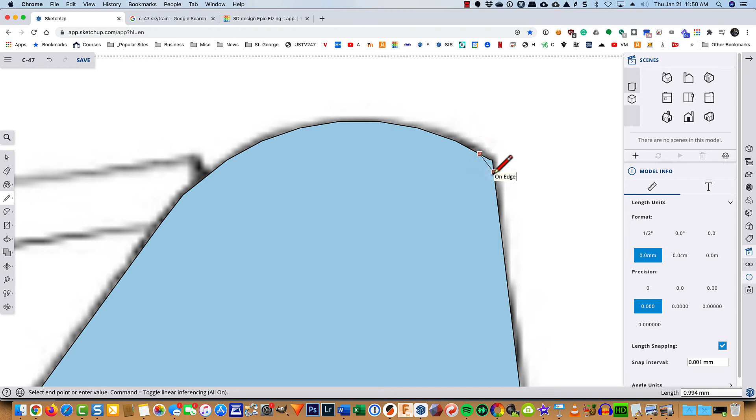So I'm going to clean this up here, just kind of take the sharp corner off. Oh, little extra line segment right there. There we go.

And here's a spot right here. Let's see, I'm going to try to put an arc in here so this is naturally smoother. I'll start my arc there, come to here, pull down until it's about tangent with this line.

Okay, number of segments is too small for the given angle. So let's try going option minus, minus, minus, minus - let's say 6 sides. We'll hit enter and try the arc again. There we go, so we'll erase that segment.

And that's all the diddling around that I'll do with it for now. So again, I'm going to save it, and then go to any 3D view. I'm going to click on my fuselage - it should be all one continuous face. P for push pull, pull it up to give it thickness.

Now we made our wings 2.5 millimeters. I'm going to make my fuselage 4 millimeters, and the reason is the fuselage is the widest part of an actual DC-3, so giving it a little more thickness means a little more filament, takes a little bit longer to print, but in my opinion the finished product will look a whole bunch better.

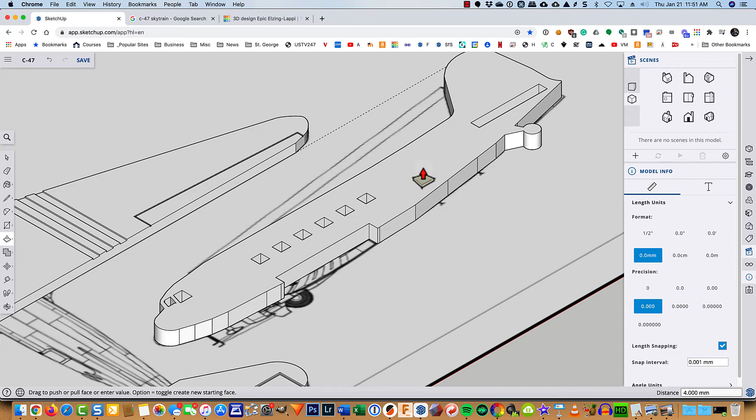Now I can't believe I forgot to mention this earlier. Right now this is made up of edges and faces, so what we want to do is triple click on it to select all of the geometry, right click, and make it a group. That doesn't just help protect your model, it's a very, very important working habit to get into with SketchUp.

So I'm going to open up the group now by double clicking on it. I'm going to right click and align my face - oh, I've got the whole thing selected. I'm just going to grab, double click to open it up, select one face, and align my view. There we go. Turn on X-ray mode, and I'll come in and add this door.

So R for rectangle, start about there, just follow up to about there, and then A for arc, start there, and come up until it tells me I have a half circle. There we go, click and erase that. Let's go to the tail next.

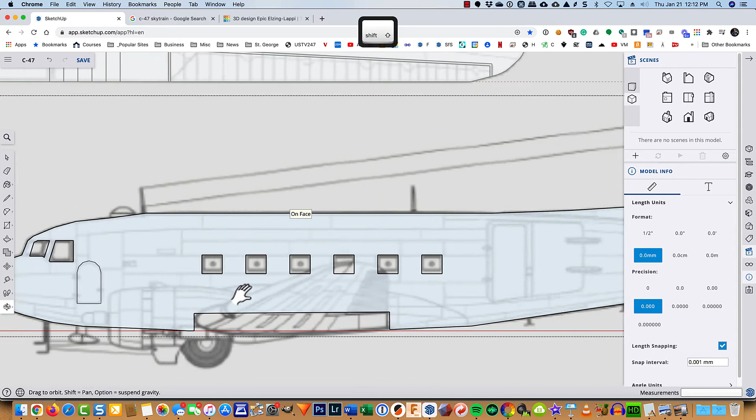Let's go ahead and add our rudder. I'll start about there, come to about there, maybe to there, there, and back down to there. And that creates a separate face for me.

Then I'm typing F for offset because the 3D printer can't print just a line. It needs to print a groove, like we did with our invasion stripes. I'll click inside... oop, I hit O for orbit, I meant F for offset. There we go, and I'll make my groove about that deep. Then I'll come down here with my line tool and split that face like so, and I've now got my groove for my rudder.

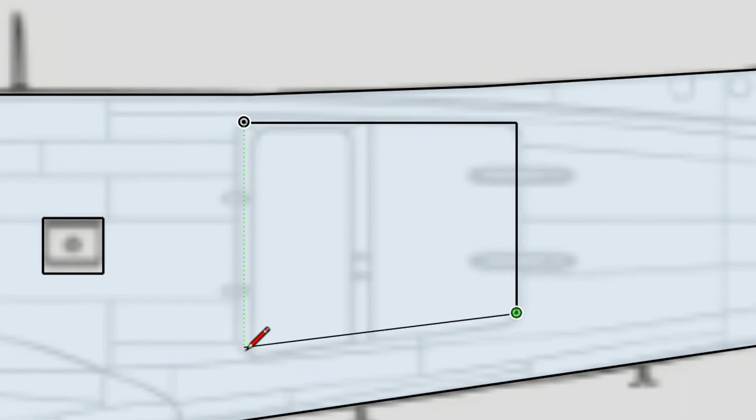Last thing I'm going to do is put in this door. This looks like a door for both cargo and paratroopers, can't say for sure, but I'll take my line tool, come across like so, down to here, and then mouse up here and pause over that endpoint. It's probably hard to see, but I get a green dashed line telling me I'm drawing along the green axis. So I'll click, and now when I come up it comes up vertical to that point where I started. So we've got that face there.

I don't think that's too much. Let's check our tape measure here to make sure I didn't make this area too thin. No, that's 1.3, so that will be 3 beads of filament for the perimeter, so that's going to be just fine.

Now I'm going to go to a 3D view. I'm going to turn X-ray off, and I'm going to come in and use my push-pull tool to push this down, maybe about that much. If it's too shallow, you're not going to see it.

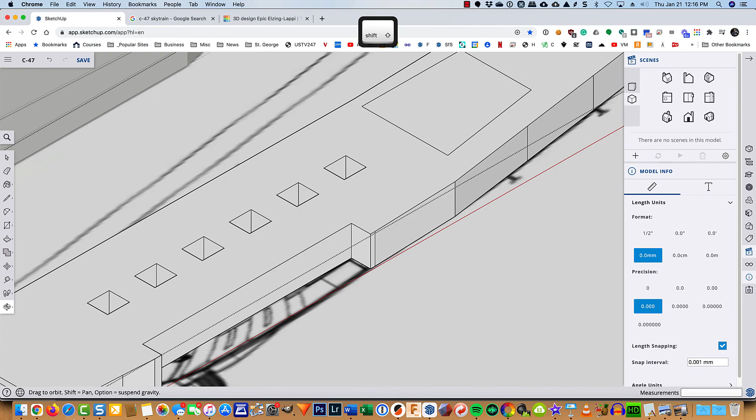Then I'm going to come over to, okay, so again my mouse goofed up, so this is what I have to do sometimes: make sure your drawing is saved, and then refresh the page. Now that takes you back to your SketchUp home, and I'll double click and open up my model. I have to reopen the scenes window and also the camera window. I'll go back to my top view here, and go Shift Z to do zoom extents to see where I'm at.

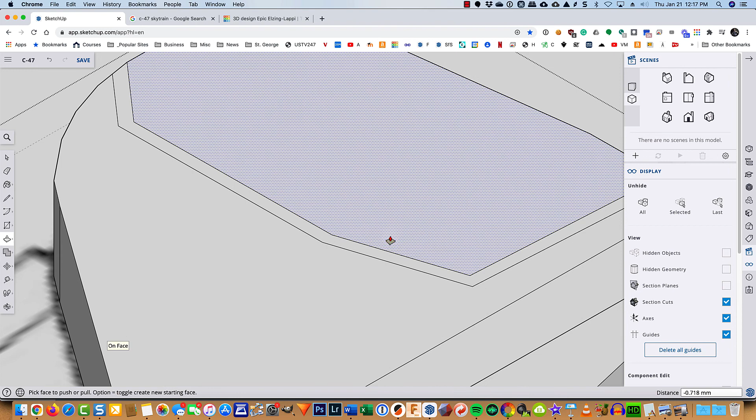Now when I refresh the page, it closed the group, so I'm going to double click it for editing again, and it probably isn't going to remember the same depth as the door over here, so I'm going to do P for push pull. I'm going to push it down, and slowly bring my mouse all the way over to that surface right there, so both doors are now equally as deep. Then I'll try to move slowly up here to the tail and grab that surface, double click, close the group, and that's all I'm going to do with the fuselage.

So I'll save it, and next we'll work with the engines.

So I was just getting set up here to make the engine and landing gear next, and I looked at this door here and thought, well, it doesn't really look super great. So here's what I'm going to do: I'm going to double click to open up my group for editing, and then I'll come into here so you can see what's going on.

I'm going to type in F for offset, kind of the same thing I did with the rudder, maybe to about right there. And that gives me a face here and a face here. I'm going to take this face, P for push pull, start to pull it up. How far? I'll just mouse over here so that it's even with the face of the fuselage. And I'll close my group, and then we'll go back to the top view here, and we'll get started on our landing gear.

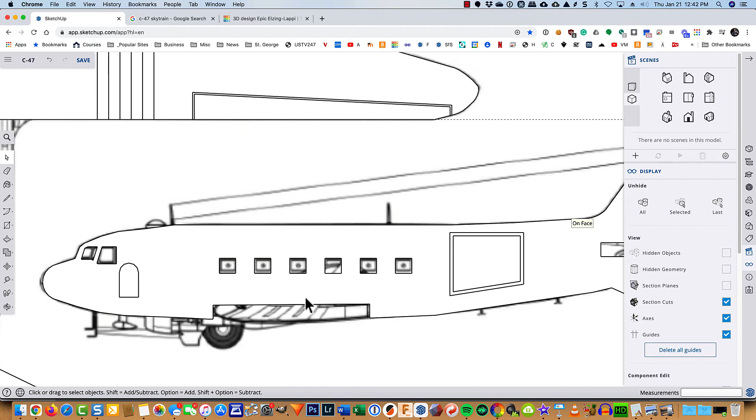Now the fuselage is covering up the drawing, so I'm going to click on it, right click, and hide it. If I want to bring it back, I can come over into my display menu, click on hidden objects, and you kind of get that it's still hidden, but you can see it now. You can right click and unhide it, but I want it hidden, so I'll go ahead and hide it, and then turn off hidden objects.

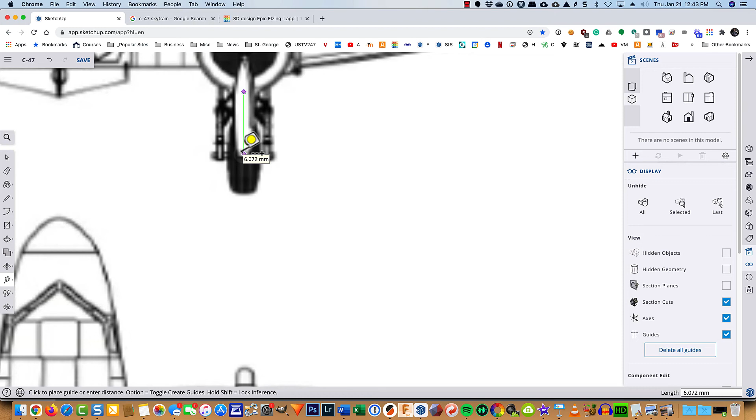So the tire for the landing gear is retracted, and I need to know from the center of the axle here to the bottom of the engine cowling what that distance is. So I'll zoom out, bring my mouse up to the area I'm interested in, and zoom in, and now I'll use my tape measure tool to measure to where I figure about the bottom of the cowling is, to the center of the axle. It looks like it's about 6 millimeters, so that's a good place to start. That'll get us close enough.

So I'll zoom out and zoom back in here, and I'm going to go ahead and just draw a line, say from about there for the bottom of the cowling.

I'm going to draw it down and type in 6 millimeters, then make a circle. This wheel is about 3.6 millimeters, so I'm measuring it because I want the center of the circle right here. I'll pull out and type in 3.6 millimeters, and then I don't need this line anymore, nor that one, so I'll just leave it like that.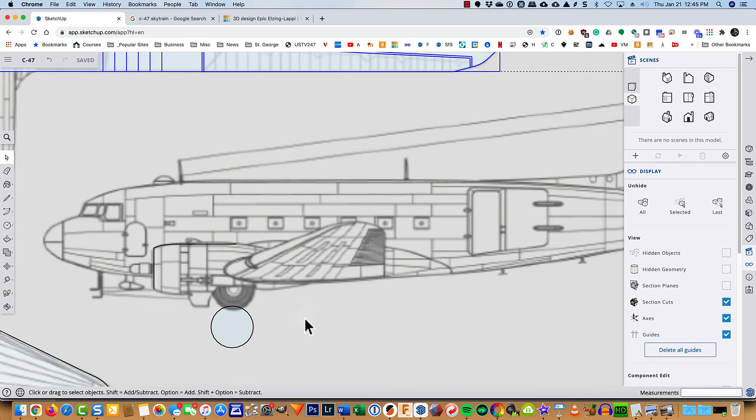Next I'm going to draw the engine cowling. I'll zoom in here, and again we have to do a little guessing because we're not entirely sure where all the points are from this 2D view. I'll come down back to about here, and looking at the top view of the engine, you can see the cowling goes about halfway back on the wing, so that's what I'll do down here. I'll turn X-ray mode back off—actually I'll leave it on, it makes it easier to see these line segments.

I'll come to about there, and then bring a point down along there—you'll see why in a second. Come to about there, maybe about there, and come across. I'll find that point right up there, make sure I'm along the red axis, and then start to come up, drawing a line to where I think the center of the cowling is. Then I'll erase that segment right there. So I've got that part done.

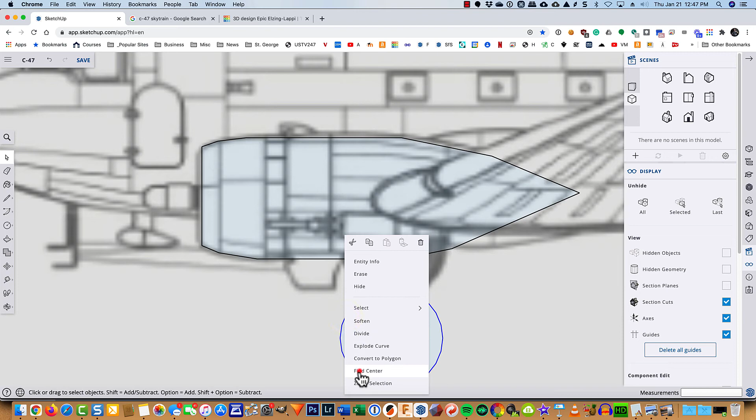Now I'm going to draw a line from the center of the circle. You probably can't see the center, so click on the circle itself and right click to find the center—it'll give you that little cross showing where it is. I'll draw a line coming up here to there, then come in with my tape measure tool—actually, we don't need to be that precise. I'll just draw a line from about there up to here along the green axis, making sure I'm on the green axis or at least along the face. It comes up like so, and then I'll erase that stuff, and that, and that, and still have my center.

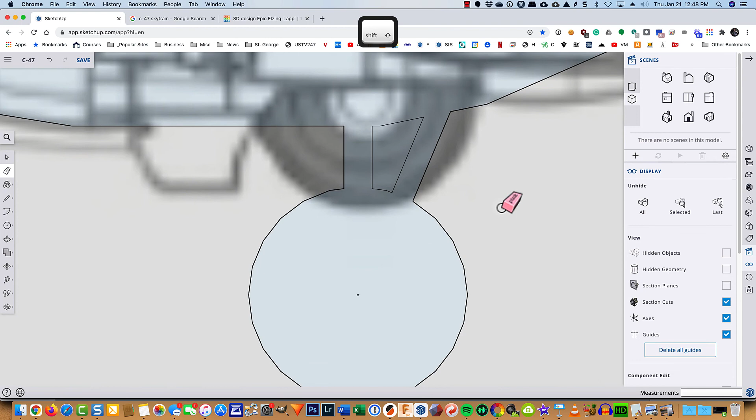Now I'm going to draw the supports for the landing gear. Same process—draw from about there, maybe up to there, and do the same thing. From there to there, and come in here and draw it from there so it looks pretty parallel, then do some erasing. Again, you don't want to make it too thin, because depending on the size of your 3D printer that can become a problem. Then I'll take this face and delete it, and I've now got my landing gear.

Now let's make the propeller shaft—this is the part that the propeller attaches to. I'll make some quick work here, using a rectangle, drawing from there down to about there, and then to give it some thickness, another rectangle from there to about where the hub is back, then A for arc. Start my arc there, finish it there, and pull out a bulge about so.

Oops, too many segments again, so let's crank it down. Hold down your Option key and subtract them—11, 10, 9, 8, 7. Let's try 7. I'll hit enter, pull it out, and that worked.

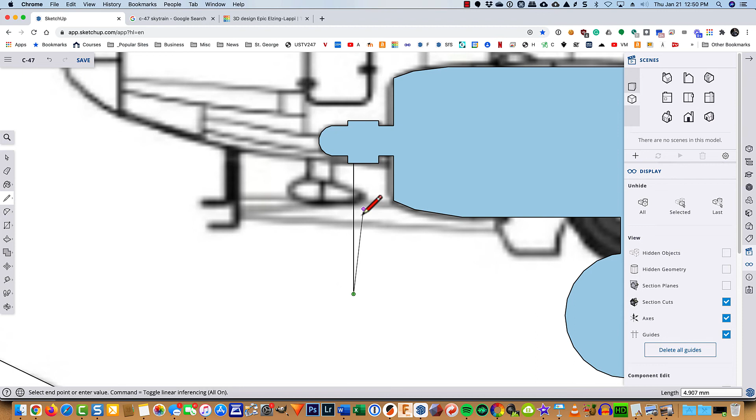So now we'll erase that, and that, and that, and that, and that—so I've now got my propeller shaft. I can also erase that line segment right there. I'll come down here, right about there, come across from there, then draw a line from there down to there, click, click, and erase that extra line segment.

So then I'm going to draw a selection rectangle carefully from about there to there, which selects this box plus those edges. I'll copy it, paste it, and put it about right there, then move it, grabbing that midpoint and bringing it up to that midpoint so the two blades are over each other. I got a few extra line segments here from the copying and pasting, but you can just go ahead and erase those.

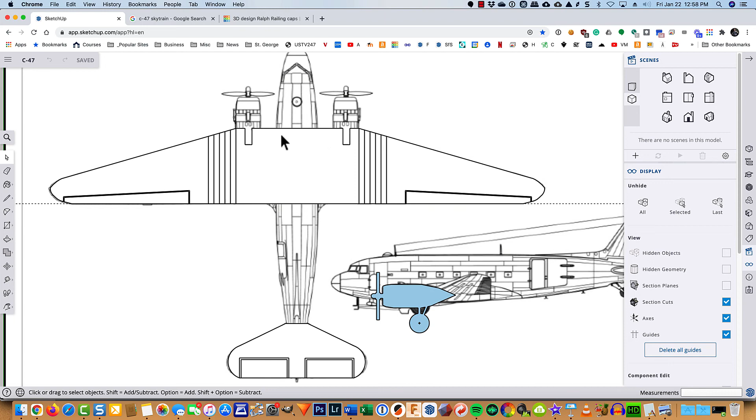We don't need this line right here, and that line right there. The next thing we're going to do is cut a notch in the engine so that it interlocks up here with the wing on the left and the right at the same depth.

So we need to know basically how far it is from the front of our engine to the leading edge of our wing. I'm just going to use my tape measure tool, click there, and come down along the green axis here. It tells me it's about 11 millimeters. It doesn't have to be exact.

So now we'll come into our engine here, and I am going to use that number, my tape measure tool, to pull a guideline back. To do that, you just find a spot on here. Try to avoid midpoints, but just find a spot along the edge, pull back, doesn't matter how far, and then just type in 11 and hit return. So this is 11 millimeters back, and that's good.

Next thing I'm going to do is essentially the same thing. I'm going to make another guideline, pull it down, and this time I want it to be about there in the center. Again, doesn't have to be perfect, so we'll just say right there.

Our wing is 2.5 millimeters thick, so I'm going to pull a guideline up. I'm going to type in half of 2.5, which is 1.25 according to the new math, and then I'm going to bring another one down and type in 1.25. So now between this top guide and this bottom guide, I've got a 2.5 millimeter tall slot.

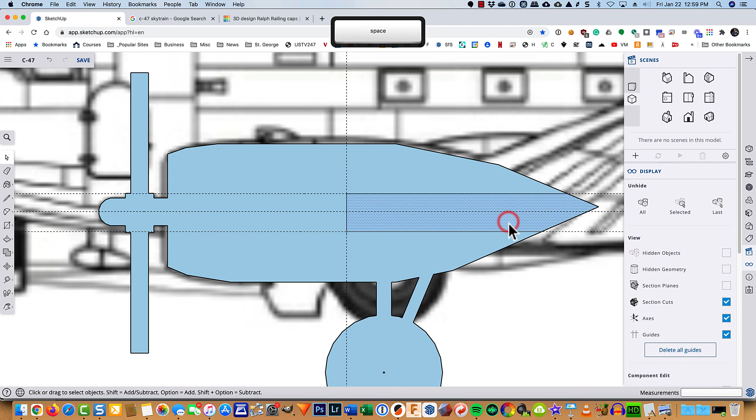I'm just going to take my line tool and go from this intersection to that intersection to that intersection to that intersection, and that splits the face like so. So I can just go ahead and delete that face. Oh, got a couple extra lines right there, so let's erase those. Now we have our notch complete.

Now we'll go to any 3D view, doesn't really matter. Use our select tool to grab that face. It should all be one face - if not, you've got an extra edge in there someplace. So P for push pull, I'm going to pull it up and type in 2.5 and hit return.

Then I'm going to take and lock all this geometry together, and I'm going to right click and make it a group. This next part's kind of fun - while we're going to print this landing gear and engine and propeller assembly just as it's oriented now, flat if you will, I want to go ahead and see how it fits in my wing. So that's going to involve a little bit of moving and rotating. Let's get to it.

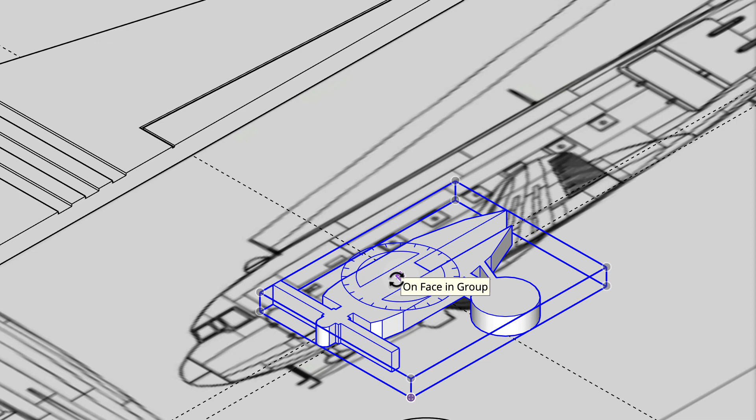So to rotate, you press the Q key. This part is selected. I'll press Q for rotate, and then I'll click on the, not this face, I want to turn it up sideways first. So I'm going to click along the red axis, then just come up along the blue axis - doesn't matter how far, but just make sure you have a blue dashed line. I'll click, and then I'll pull it down like this. It'll usually snap to about 90 degrees, but if you just want to be absolutely sure, just type in 90 and hit enter.

Then we're going to do that one more time. I'm going to come to a top horizontal surface, like say that top of the part of the engine right there. I'm going to come along the red axis, or it could come out along the green axis as well. Click and move it around, and again type in 90 and hit enter. So we now have the proper orientation.

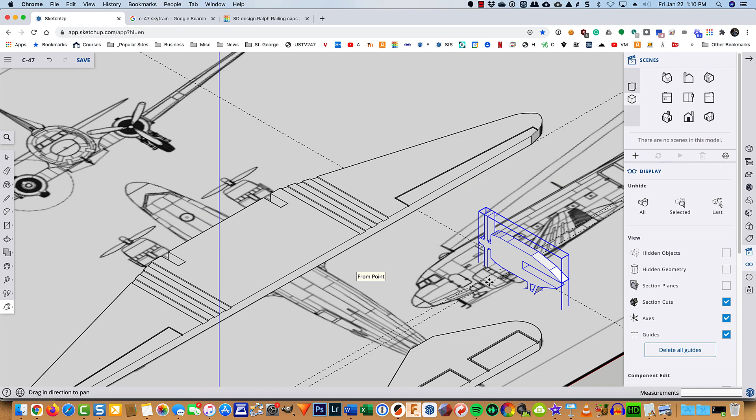So what I'm going to do next is go ahead and move it. Let's see here - where's it going to touch? This point right here, where the little hand is going to line up with this point back here. So I'll type M for move, and I'll grab that top point right there. Then I can't see exactly what I'm doing here, so I'm going to type X for X-ray, zoom in here and put that point right there, turn X-ray off, and let's see how that looks.

I like that, so to get it back flat, I'm going to do some undos there. And then I need 2 of these, don't I? So I'm going to take this one, copy it, paste it, and just put it anywhere, because once we get it on our printer bed for slicing, we can move the position of the various pieces. So we now have all of our parts constructed.

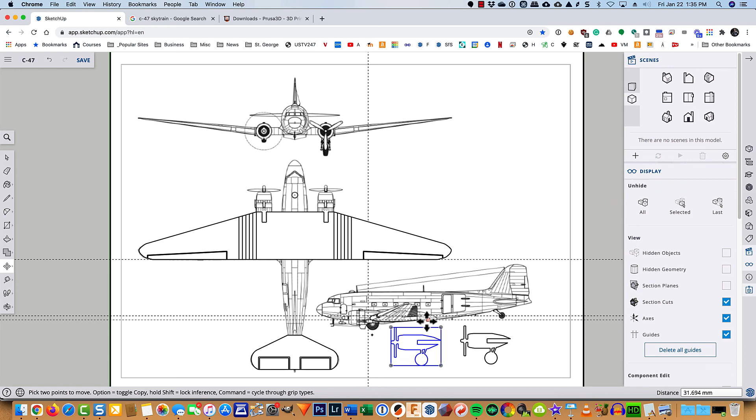Let's just do a little bit of house cleaning here. Grab my engine, grab the move tool, move that there. Select this one here, M for move, click, and pull it down there. I'll come over here under displays and turn on hidden objects so I can see my fuselage. I'll right click on it with the select tool and unhide it.

I'll go ahead and save it. And the next thing I'm going to do is export it as an STL file, which is for 3D printing. I'll go ahead and just call it C47. Doesn't matter what you call it or where you put it, as long as you can find it.

Then I'm going to go to my slicing software. This is Prusa Slicer, it's free. The other most popular one is Cura. So I'm going to add my C47 STL file, and it looks like it came in okay. I'll go ahead now and slice it.

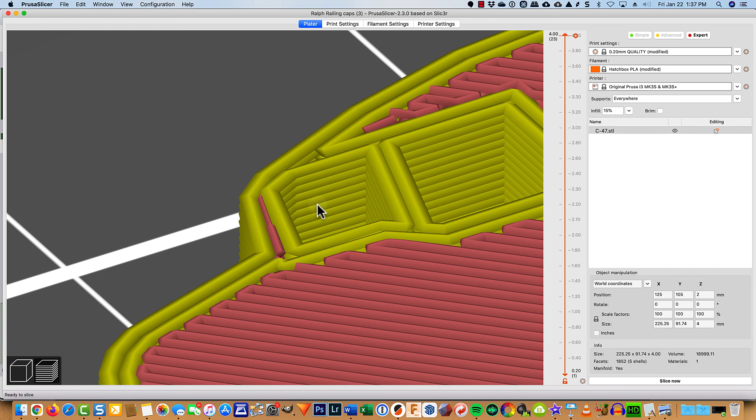I'm pretty sure the wings are going to be okay. Let's see how we did up here. Oh, that's going to be fine. So you see, this is a perimeter here. We've got a full bead of filament on the outside perimeter and a full bead of filament on the inside perimeter for our windows and openings. That door looks okay.

That opening looks okay. Let's take a look at the tail. So we had a spot right there. You can see I don't have 2 perimeters for the outside of the fuselage. I've got this full one, but it breaks right there. I don't think that's going to be much of an issue. I'd be more worried about it if this corner and this outside perimeter were actually touching. So we'll see how it prints.

Now, with this particular model, this fits on my printer just fine. But what if I wanted to make it bigger? You can do this with just about any slicing software out there, or you can scale your SketchUp model, but this is a little bit easier. I've got my model here, and down in this corner I've got scale factors.

Instead of 100%, which is full size, let's try 150%. I'll hit tab, and that makes everything bigger. Now I need to break this into individual parts, and that's this button right here. So now I can select the wing and just kind of move it over. If I rotate it, I might be able to get it on the bed.

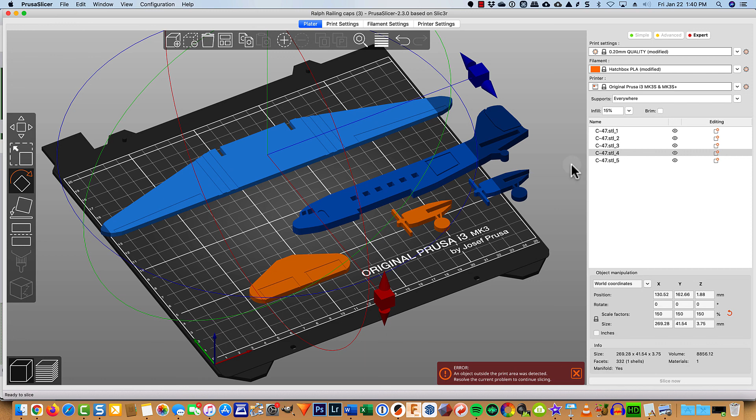I'm not exactly sure if I can, but we're going to try it. So I'll kind of pull around like that, and then move it down from corner to corner. When it turns green, it tells me it fits. So I'm going to kind of just nudge it up there. I'm going to take my fuselage and rotate it around and pull it over here so it's green and it fits there. Looks like I'm going to make it.

I'll take this part, the horizontal stabilizer, and put it up there, and then put the engine there, and put engine number 2 right there. And everything's orange, so everything fits. So I'll go ahead and slice it one more time.

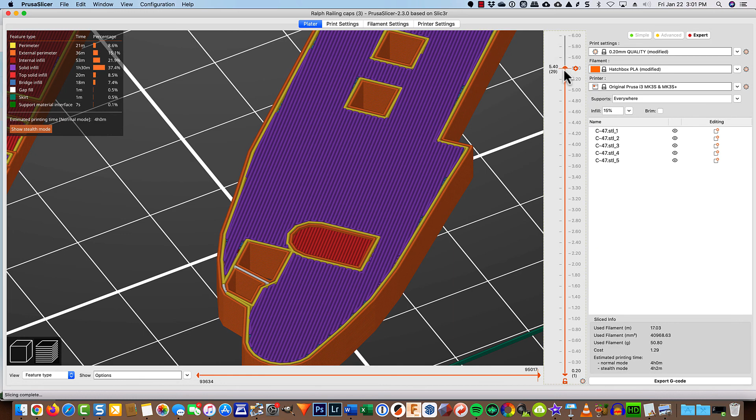Prusa Slicer has a color coding that they do for the different types of fill. We don't need to go into all of that, but we'll come into, say, right about here. So the orange is the outer perimeter, and then the yellow secondary perimeter, and then this is just the top fill. And then as we start to move down through the layers, there's another layer fill, kind of crisscrossing back and forth, and then there's our honeycomb fill on the inside.

And when we get down through the honeycomb fill, we get back to different kinds of layers that sort of crisscross perpendicular to each other. And there's our very bottom layer.

So with that completed, I just go ahead and export the G code, which creates a .gcode file. Now go ahead and replace it. Doesn't really matter what you call it or where you put it, as long as you can find it. So that G code file is the file that you'll transfer to an SD card, or you'll send it to your printer via a USB cable for 3D printing.